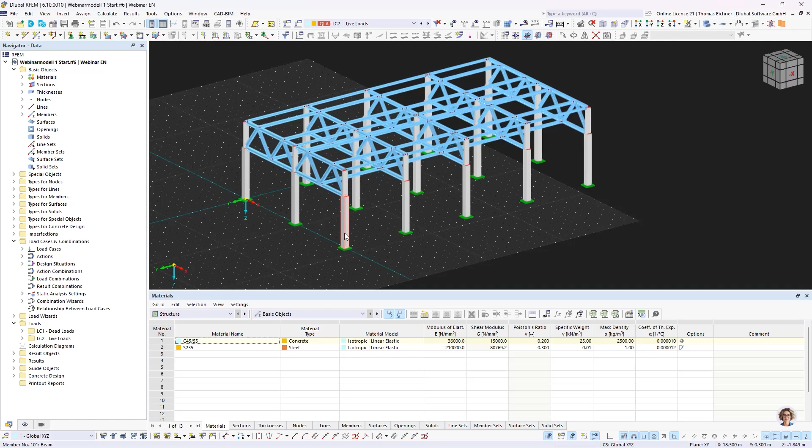We have 8 times 9 meters in the length, and we have 50 or 60 centimeters times 60 centimeters columns here. Those columns will get smaller on top, and this top structure is mainly a truss structure in one direction.

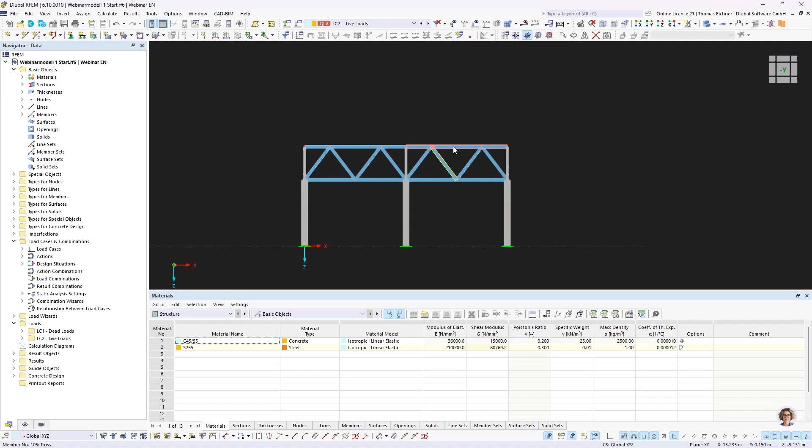So we see in the X direction we have these trusses here, and they are all trusses in this direction as well. Let's go here, we see it - we have these truss sections right here.

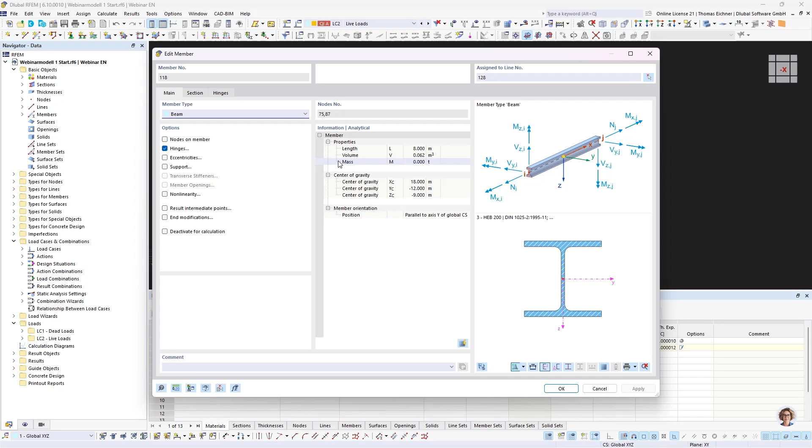In the other direction, we don't have these trusses, so I would estimate this to be less stiff. We can inspect the members in the Y direction as well, since I planned them differently. In this case, I gave them the beam member type and added some hinges for the rotational degrees.

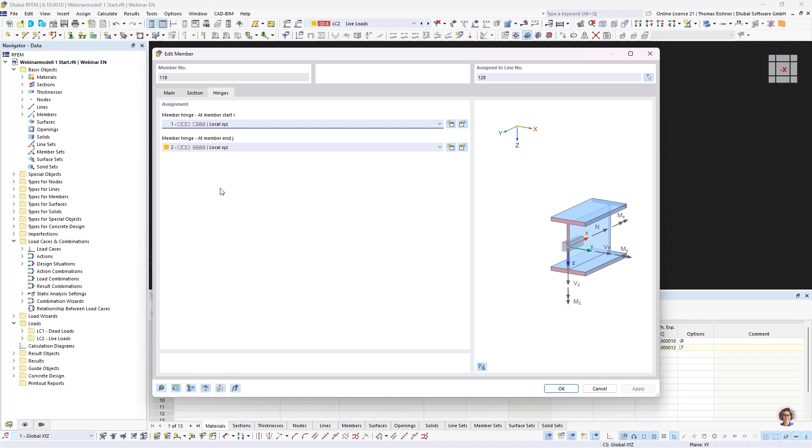So we will have the Y and Z rotation free on both ends, and additionally the rotation about its own axis will only be free on one side. Because if we placed it free on both sides, the system would become unstable, since the member could rotate around itself. So that's about the structure type here.

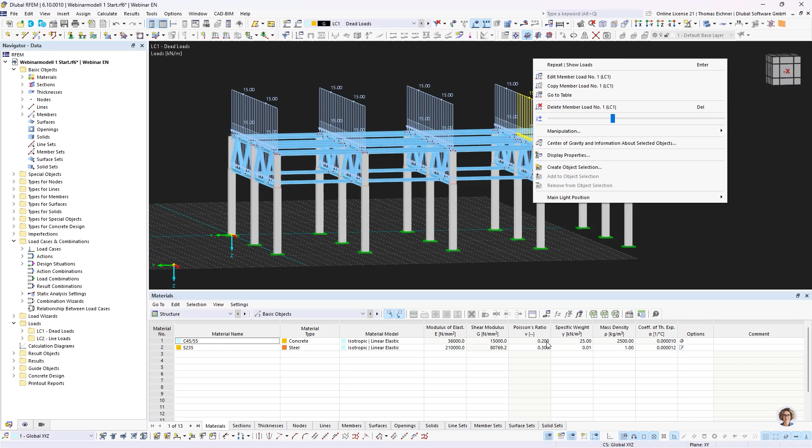We also have some loading - some dead loads, which we will inspect right here. It's really simplified to just some member loads on one hand on the top of this roof structure, as well as on the bottom part of this roof structure. So in total there are 30 kilonewton per meter in each of those rows.

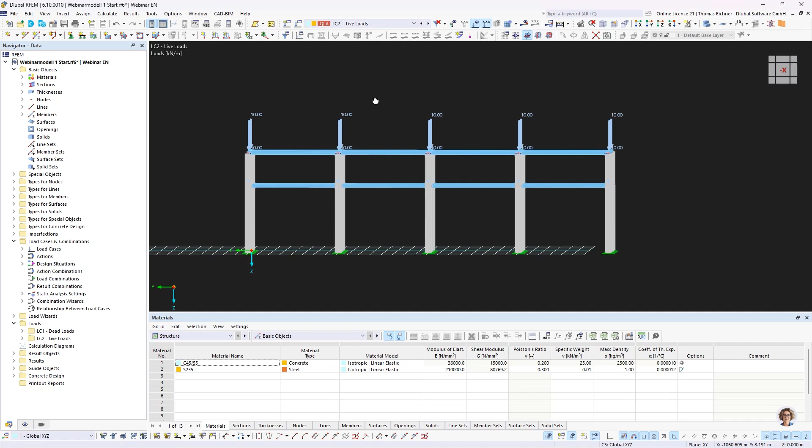And the same is also applied for the live loads, which I just simplified to be 10 kilonewton per meter on the top side as well as on the bottom side.

So now we are at the perfect start for the dynamic analysis. The first thing is we have our model finished, we have our loading finished, and we maybe also made some design already for the structural limit state. Now we want to just add the earthquake design to the structure.

And now I will guide you through that procedure. We will just start by going into our add-ons - that's always the first step to take. We will go into the add-ons tab, and there we will go for our dynamic analysis.

Since the modal analysis is always needed for one of the others, we can spare a click here. I will just go for the response spectrum analysis - modal analysis is checked automatically as well.

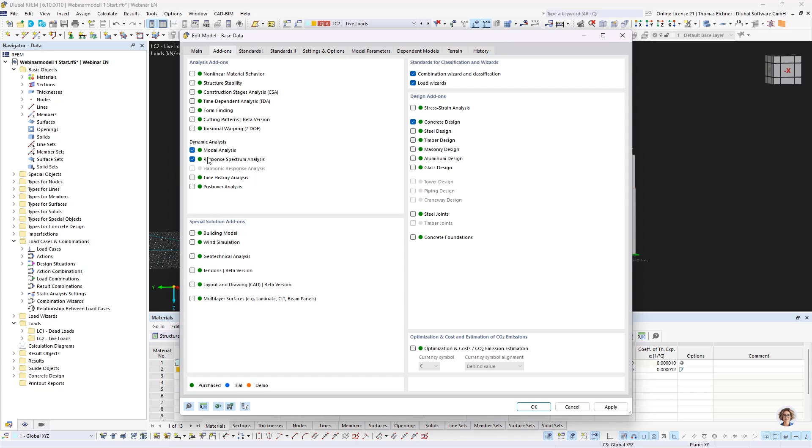Then we can check for our standards, and yes, we will just go for the German annex. The whole webinar works the same for different annexes as well as different standards, because the main difference in selecting something here is the response spectrum, not the analysis procedure.

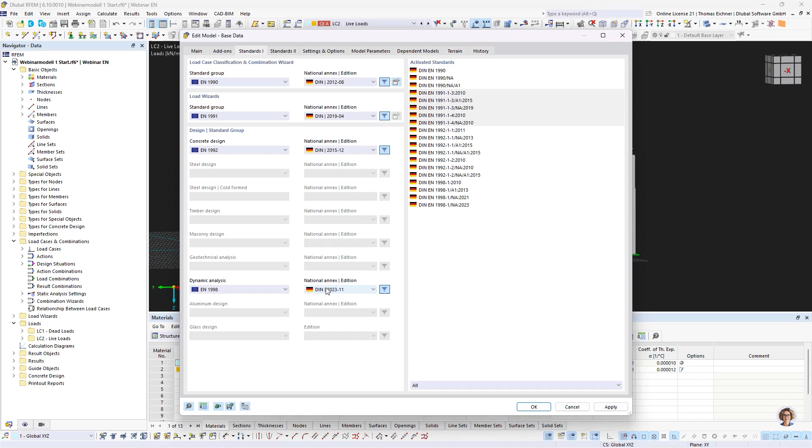So we will go with the Eurocode and click OK here. Then we will see that we have added our modal analysis settings, spectral analysis settings, as well as our dynamic loads. With that, we can start up. One thing we need for dynamics is always the masses, since in the dynamic equation we also have the masses.

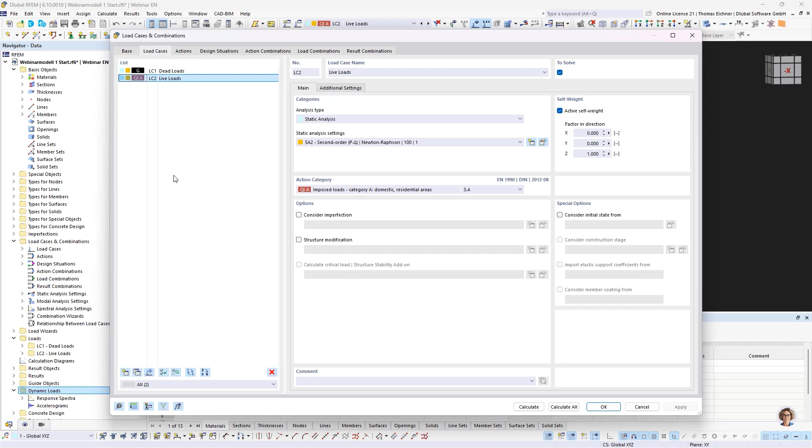So we need to define the masses. In general, we try to define the masses to be as precise as possible for the situation in which the earthquake would happen. The Eurocode, for example, gives us some combination rules to achieve this, and we will use them for automatic generation.

So we will go for our design situations, and there we will pick our seismic mass combination. For that, I will pick our combination wizard load combinations, which means now we have it automatically created. And if we now go for load combinations, we will see just the combination created, and this is the one we will use for our dynamic analysis as our masses.

So now we can go into our load cases, create a new load case named modal analysis. I'm just going to rename it here, and we will pick our masses, which we just created. We will go into our modal analysis settings, just for you to see what we are setting here first.

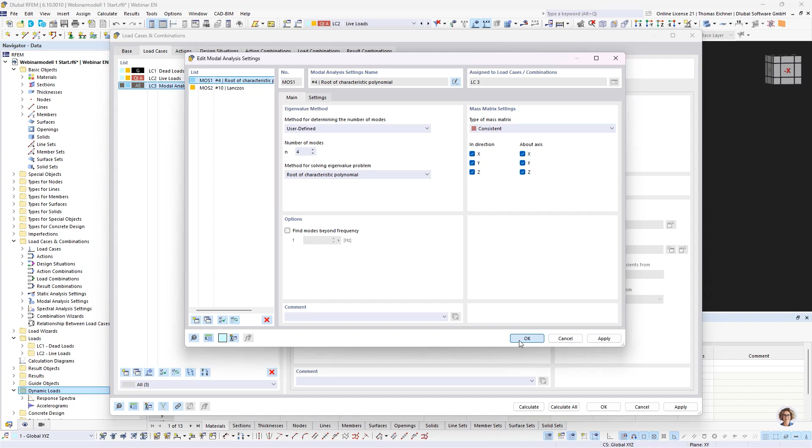Pretty much I will go for the root method of solving, since we will use that also later on for some automatics, and so I want to have it comparable in general. On the right side, we won't do anything yet. We will pick the consistent mass matrix and all directions will be active, so nothing too special here. We will press OK and continue with our response spectrum analysis.

Within the response spectrum analysis, we almost always need to consider accidental torsion, so I will just directly activate it here at 5%. That's the way to go. We will go for response spectrum right here.

We can quickly look inside. There we have an AGR value of 0.6, and we have ground type AR. If you're interested in how to pick those input values, we do have our snow, wind, and seismic load maps, which can be seen right here. With that, you would be able to just click somewhere here and find your acceleration value right there.

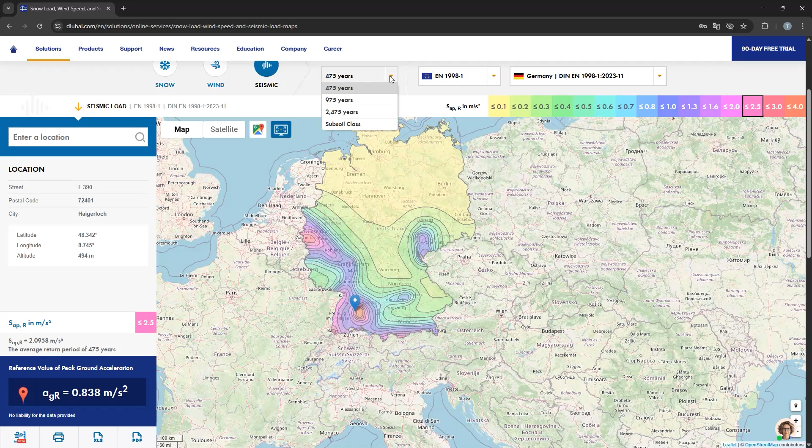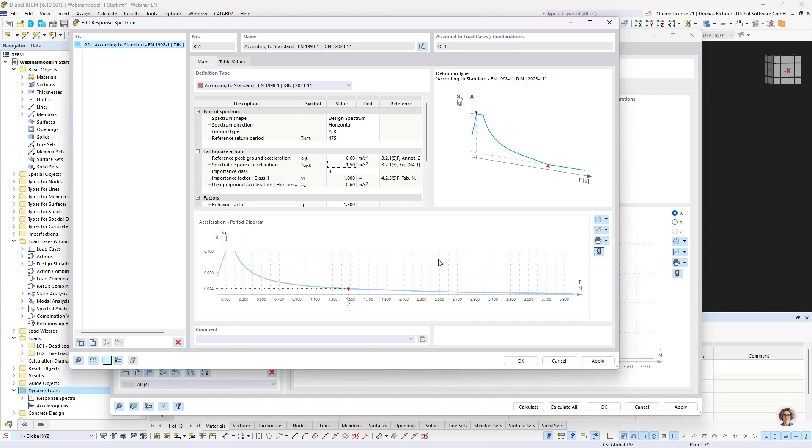Also, as soon as you switch to the subsoil class, which is here, we can also find our subsoil class. We won't take a specific site here; we just go for the standard values, which leads us to a nice 1 meter per square second peak acceleration. Also, if you're interested in those values in the gravity domain, we now have the toggle to switch between the visualization of a percentage of G or the absolute values. The same also applies for the tables, so now that's easily transferable.

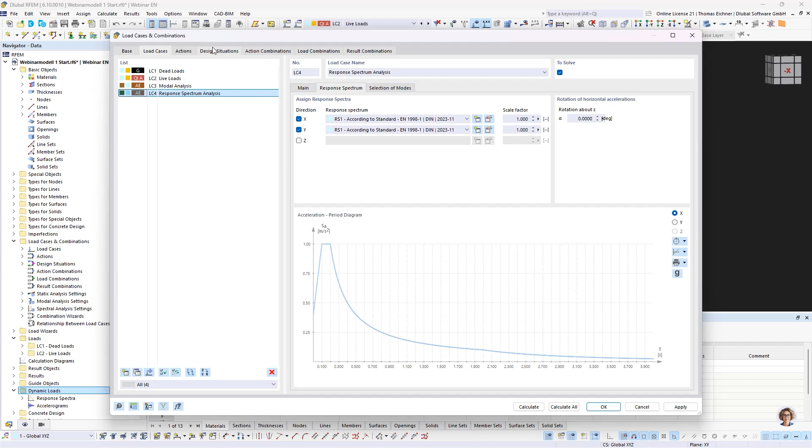When that's done, we see we have the X and Y direction, already finished here. So the last thing would be to give the results to our design add-on in the end, and this can be done by creating a new design situation. Let's go for the seismic situation in this case. And there it is, we will have to select something else here.

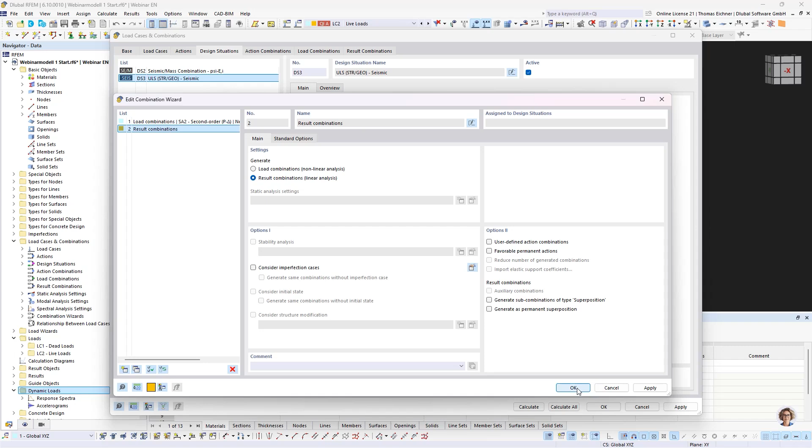If we rewind ourselves on the response spectrum analysis, we do work with results only, not with loads. That means we can't use these load combinations; we will need to use result combinations, and therefore it needs to be created because it's not automatically created by the program. So whenever you do this, you will look to create a result combinations generator. With that done, we can select it for a seismic design situation and also see the outcome right here. There it is, we have our dead loads combined with our live loads as well as with the earthquake loads.

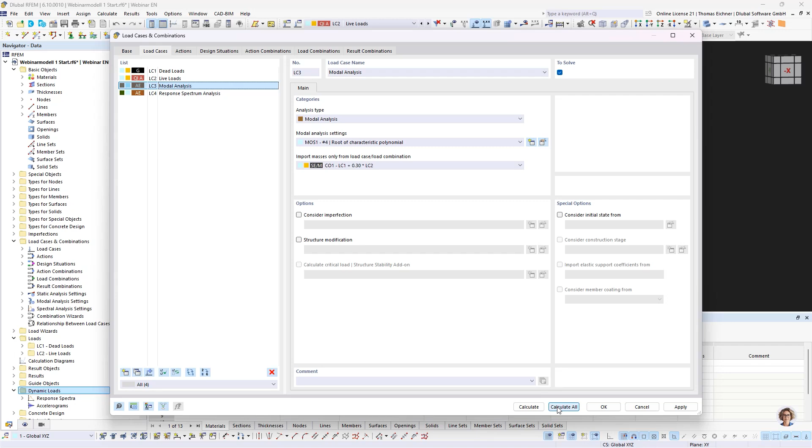Okay, so that's it for that. I would say for the modal analysis, that's the root, that's perfectly fine. Now we will just go for calculate all, and let's see what we get out there. So now it's done, we got our 4 eigenfrequencies. Of course, there won't be enough. We have a fast calculation.

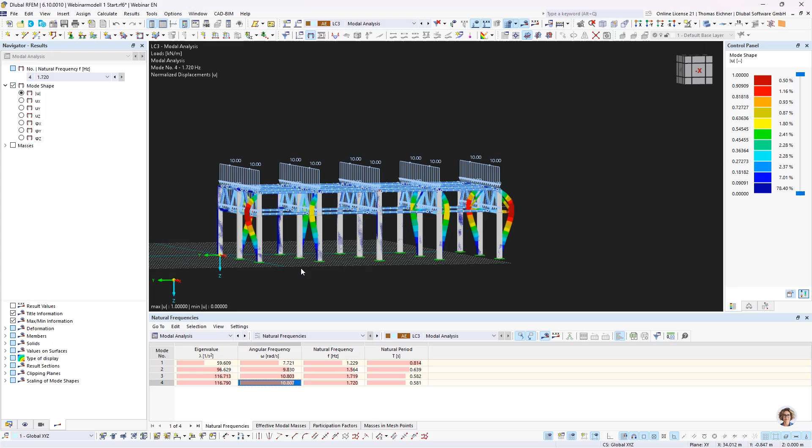We can look into our effective modal masses, and with that effective modal masses, we will see for the X direction, for example, we still don't have any mass participation at all. So that means we will need to increase our amount of modes.

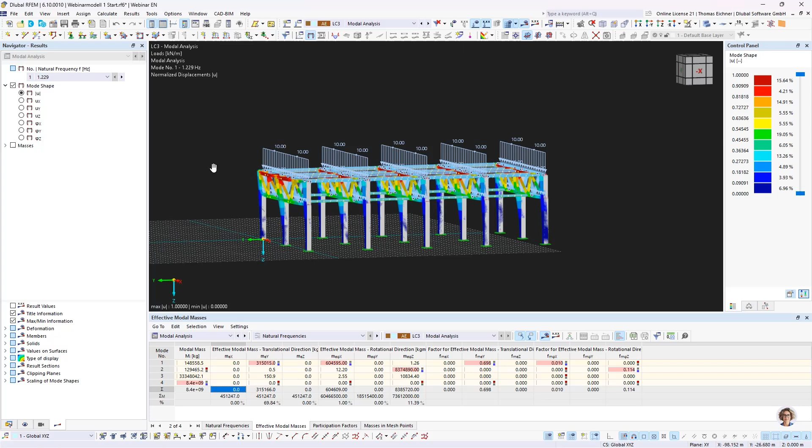And now there would be several options, and now we will look at them right here. Let's delete this one and copy that. From that copied one, I will just switch it to the automatic to reach effective modal mass factors. So this would be our first setting. Let's call it 'all,' and with all, I will reference this mass matrix setting since we did select everything right here.

Okay, for the next step, we will go for another one, and within that, we will deactivate the Z direction as well as the rotations around the X and Y direction.

And this is going to be our XY Z. So we reduced, within that setting, the mass matrix to only be in the directions of our investigated earthquake. We selected the X direction and the Y direction within the response spectrum analysis. That means we will have to consider the X and Y direction here. And also, a bit depending on the torsional stiffness of the building, in X and Y direction there's also the rotation around the Z axis, so that's like the torsional modes here.

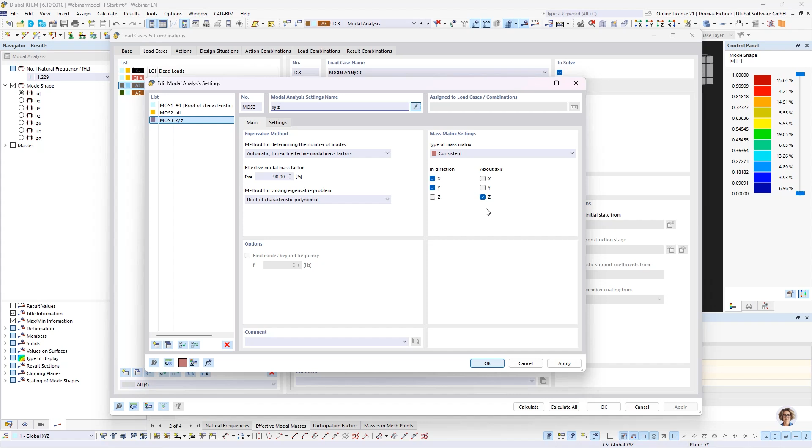Okay, for settings, we won't do anything here because we don't have to neglect masses. Just as a hint, if you have a grounding plate, then it is needed to neglect the masses there. Because if you won't neglect the masses of a supported surface, the program most probably will never reach the effective modal mass.

Since the plate can just won't move, I mean it's fixed on the ground, so it won't have any modes except for, how do I say that, like computational stiffness results. That means if you have a fixed support, it's not completely fixed. It's something like 10 to the power of 12, and therefore there would be modes also for the plates, but they wouldn't be usable. So the tip is, if you have grounding plates, you would neglect the masses.

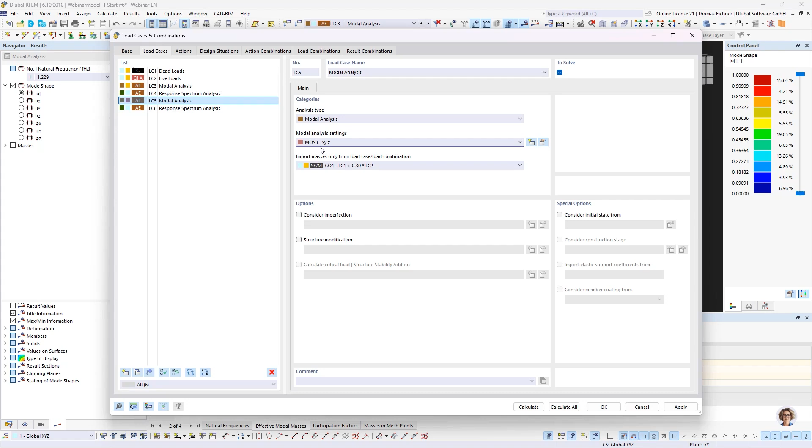So now let's get back to the topic. We have now two modal analyses, one with the whole setup and one reduced to only fit our loading direction. With that done, we can select all here, and I'm also going to do a copy paste of those two. For the top one, for the modal analysis, for the second one, we will pick the X, Y, and Z settings. And for the last response spectrum, we will pick our load case 5, our new modal analysis. And now we will have something to compare.

And for that, we will now have to calculate it. I won't let it calculate through here since it takes a few minutes for the results to be there. So we will just jump into the calculated file. Within the calculated file, it's pretty much the same, just with the results.

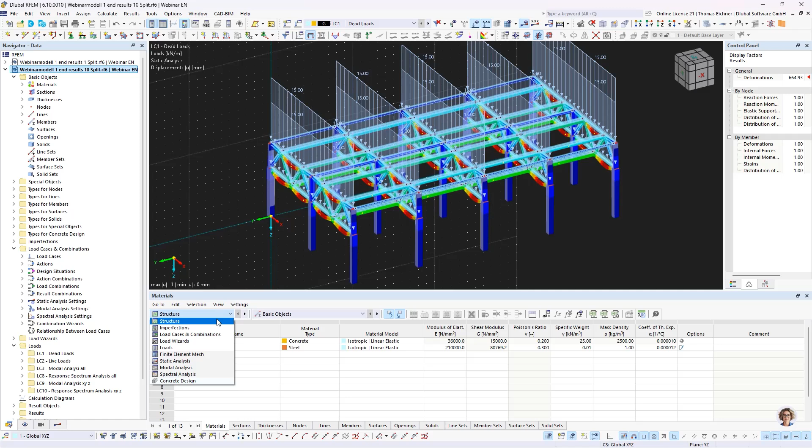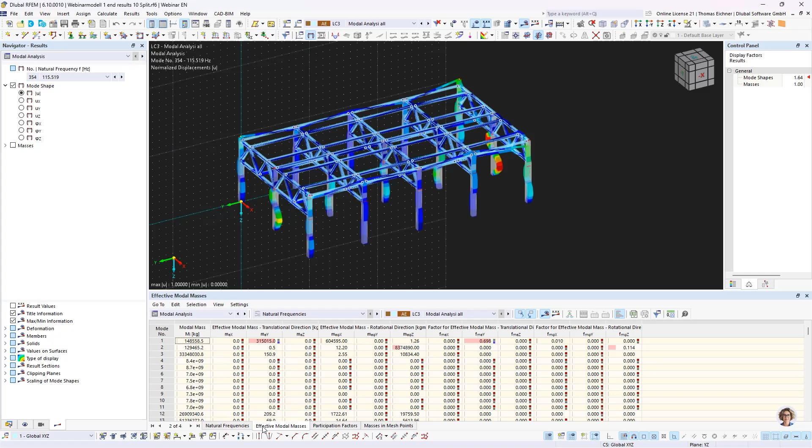And what we want to see here is the results from the modal analysis. So let's look at that here. Now we are looking at this precise modal analysis, which was with all mass matrix entries, and we will see around 354 modes, where some modes are really only local modes in that case. So we will have to reduce those. We will also see in the effective modal mass tab that we have tons of modes which just don't have any effective modal mass here, so they could be neglected in general.

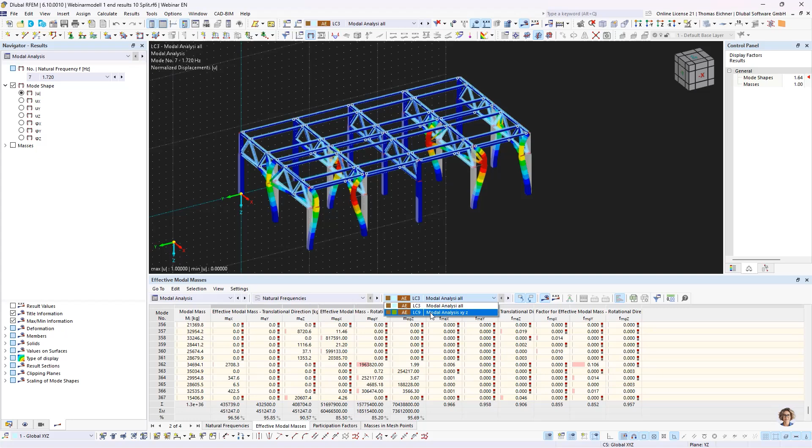Okay, so let's compare it to our second one. As a reminder, we have 367 modes here. We will go for our modal analysis X, Y, and Z, and there we will see we reduced the amount of modes drastically. We only are left with 79 modes here. So the mass matrix settings are one way to drastically reduce your eigenforms.

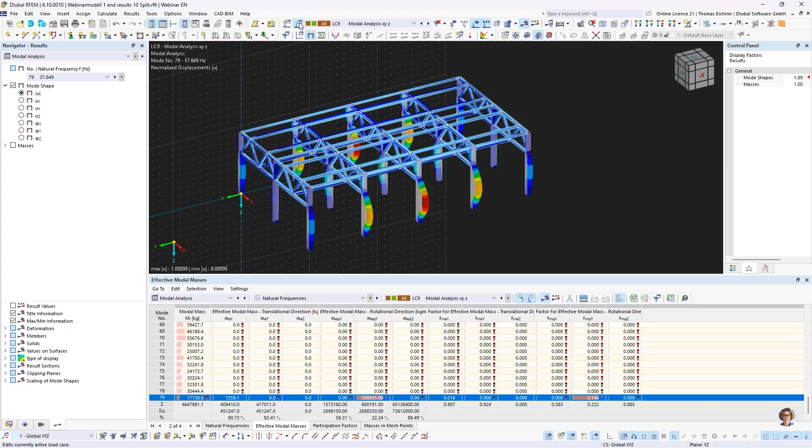Also, if you like to have some more speed within the modal analysis, we also have the possibility to change to the diagonal matrix here. Well, it's not as precise as the consistent matrix, but we also have to reconsider we are working in the earthquake field within the response spectrum analysis, and there are lots of uncertainties.

And if you compare that all to, for example, Pendelschlagversuch, it's like if you test windows, there you would let a tire fall against that window, and that's called the German Pendelschlagversuch. So within that Pendelschlagversuch, we would carry out a time history analysis, a nonlinear time history analysis, and each time step and each result is extremely important. So for such analysis types, the consistent matrix is needed. But for earthquake design, we can always think about using the simpler diagonal matrix.

Okay, so we will stay with the consistent one. And yes, maybe one more hint here. We have further options. We can also go for the modal analysis to be carried out within a frequency range. So for example, you could go and search for natural frequencies above 15 Hertz and below 17 Hertz.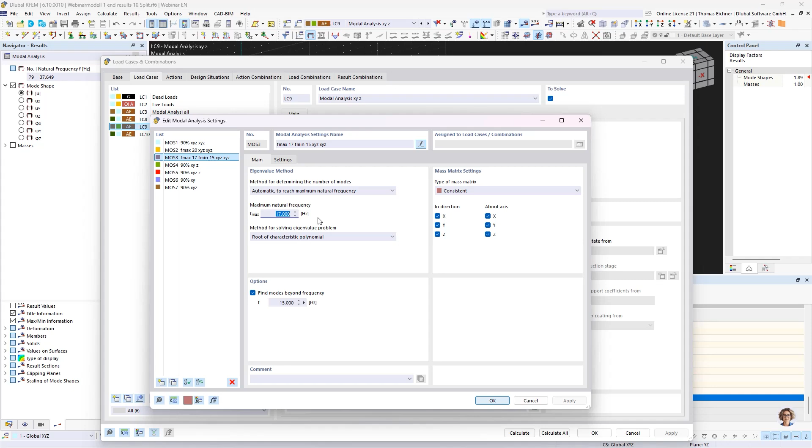Let's just do this for a second. We will just select this one, this one modal analysis settings. The rest can be the same, and we will just calculate that one.

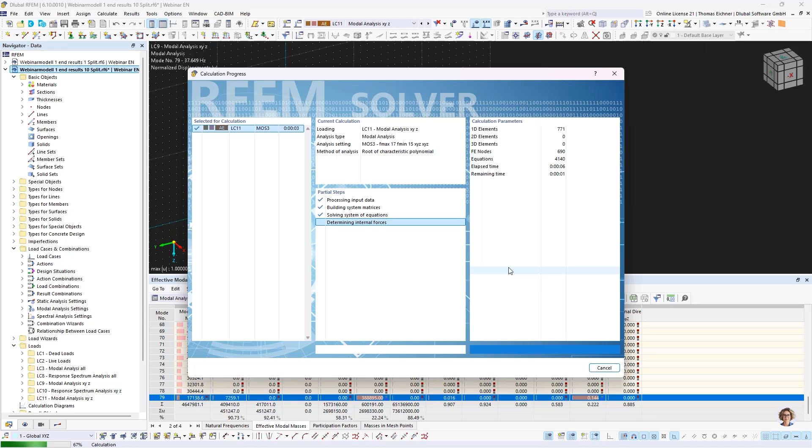The biggest benefit is that it's faster if you know your region of frequencies you're investigating, because you don't have to calculate all the previous frequencies in that case. Now we've got it, and we can look at the natural frequencies there. We see perfectly fine - we got all the frequencies between 15 and 17 Hertz. With that, you can construct your own system of modes here.

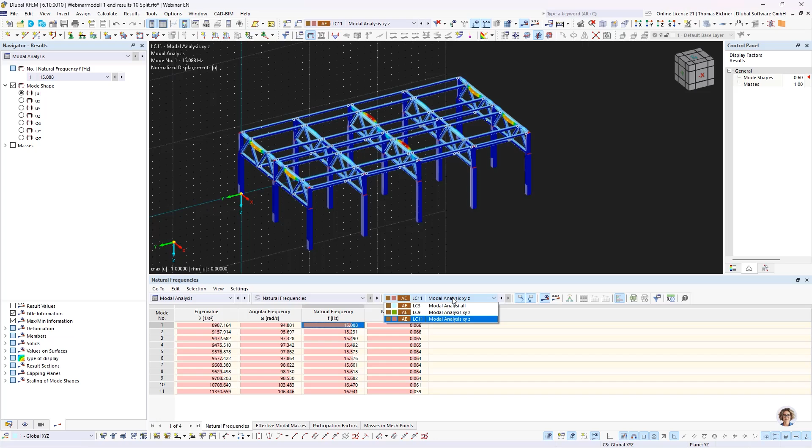Okay, so another thing - I'm going to deactivate the results there, go into our frame model, and we will look at our finite element mesh. What you see now is that we have multiple finite element points here on every beam member.

There can be one eigenform per degree of mass freedom - that's how I call them. For example, this finite element point: with our mass matrix definition, this point could move in the x direction by 1, and that would be one mode. It could move in the y direction by 1 - that's another mode. And it could rotate around the z-axis - that's the third mode. So for each of these points, we have theoretically 3 possible modes.

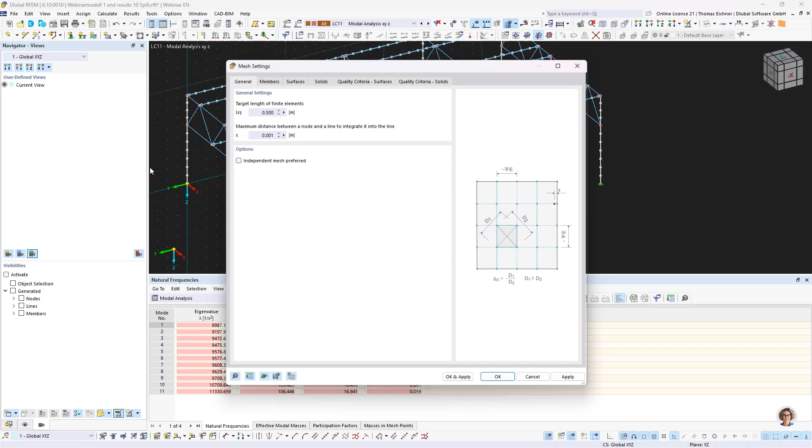That means we can reduce our amount of modes if we reduce our amount of mesh nodes here. For those systems, we can just go for our calculation here - we go into our mesh settings and into our members.

Within that, we can see that we have a division of 10 for special types of members. This field is also used for the checkbox below - it says activate member divisions for second order and large deformation analysis, structural stability, dynamic analysis, imperfections, initial strain, and so on. With this checkbox, we will activate the split also for the dynamic analysis.

I'm going to keep it simple - I'll just pick one here and leave this option on. That's perfectly fine, and with that we will get rid of our plenty of in-between FE mesh nodes. It's also worth noting, as you can see, only the beam members have those mesh nodes - the truss members do not. Internally in the program we implemented simplifying those truss members to 2 points, since it's just not needed to have more, also for static analysis.

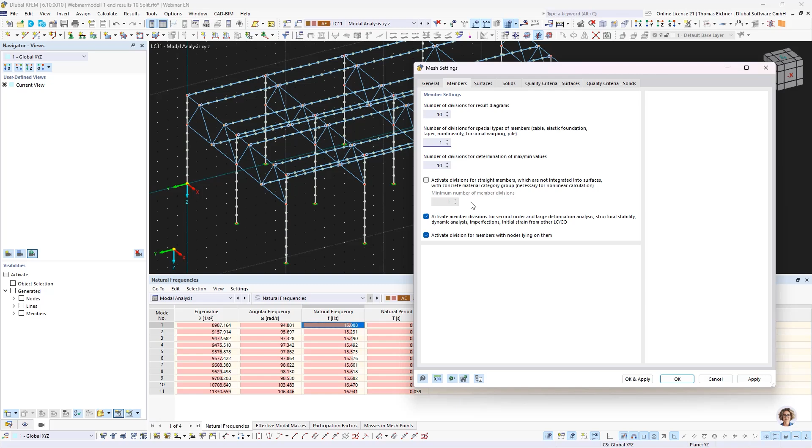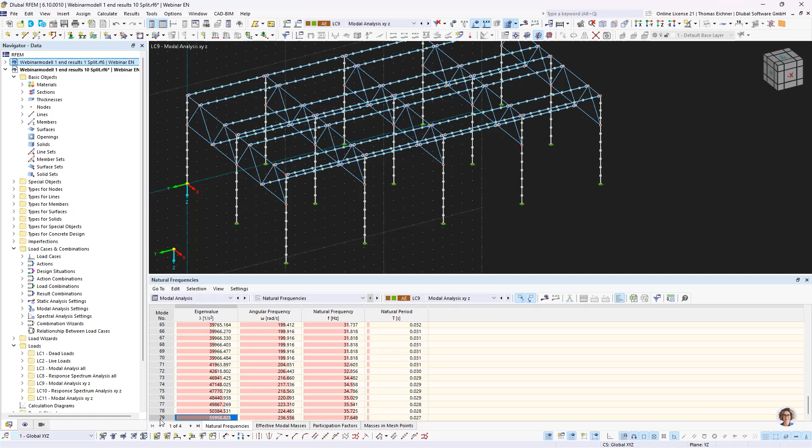Okay, let's see - I'm not going to save it. I have the results of that exact file also right here. Let's look at the one with one split. Before we switch, I just want to have a last look at our X, Y, Z modes - we had 79 modes in this case.

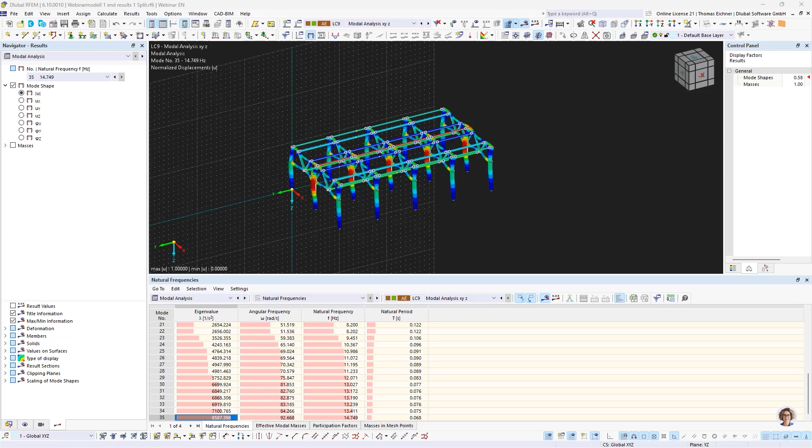Now let's see - we do have the response spectrum analysis carried out already here with the whole mass matrix. We also have the response spectrum analysis carried out with the reduced mass matrix. All the other settings are pretty much the same.

Now we can go and look at our results, since it's important that our results do match with those simplifications. With that, we will just go for the maximum displacement - we can see it's about 6 millimeters. If I switch here between my response spectrum analyses, it's pretty much the same deformation figure, and also the same 6 millimeters. For a rough test, I would conclude the results to be equal in both analyses.

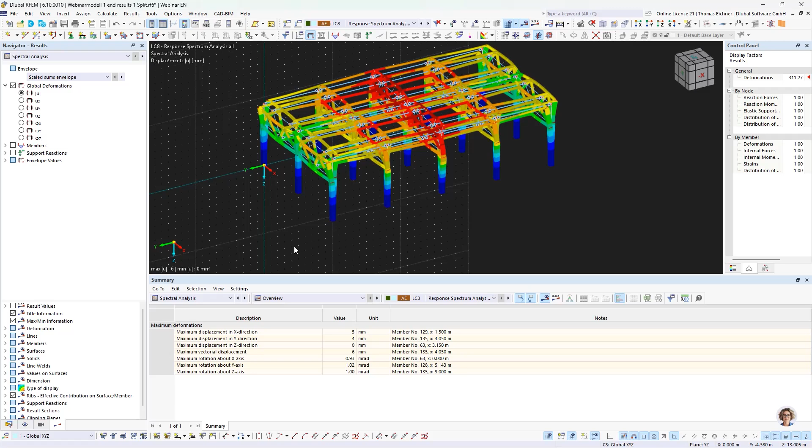Okay, so now we have our model reduced, we have our eigenforms reduced. What I did not mention yet is the selection of the eigenmodes within the response spectrum. In general, we will go with the simplified one - if we go for the selection of modes, this won't be on and everything will be selected. So this would lead to 35 modes that need to be calculated.

But since there are lots of zero modes, we can further reduce them here. We will just go for an effective mass ratio - we will neglect all the ones which are, let's say, some testing, all below 1%, and we will still be over 90% in the y direction, so that's possible. With that, we will lose again like 2/3 of our eigenforms.

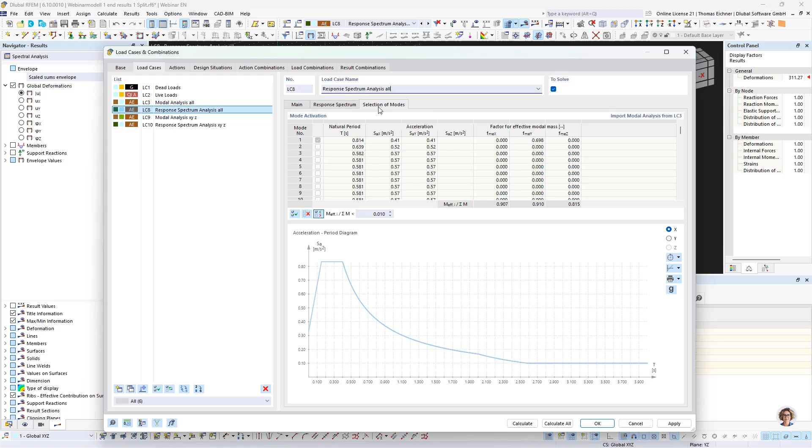What do we have left? 1, 2, 3, 4, 5, 6, 7 modes - we're left with 7 modes within the simplified one. What would it be with the exact one? Here we see it - I also adjusted it here, and I counted them before: they are roughly about 20. So again, quite a lot more than in our simplified variant.

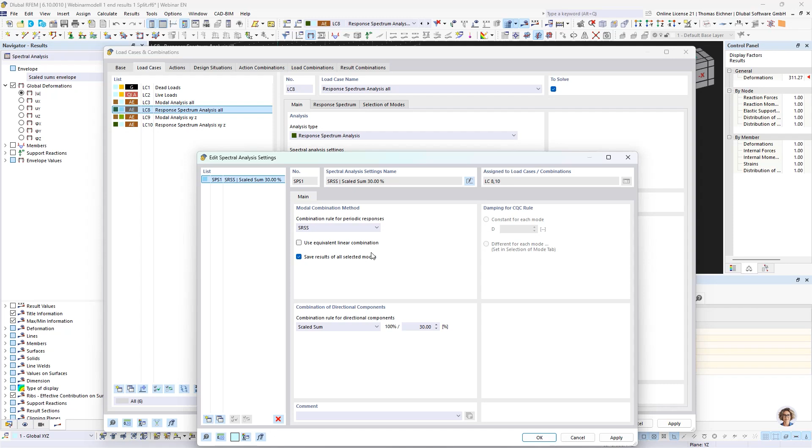Okay, so we have that. Now we will also go for the last performance setting. Within our spectral analysis settings, we have the option to save the results of all selected mode shapes. I almost always do it. It's going to increase the calculation time because it also has to save everything in each calculation, and it will also produce bigger files since you will have all the nodal and member results for each mode available.

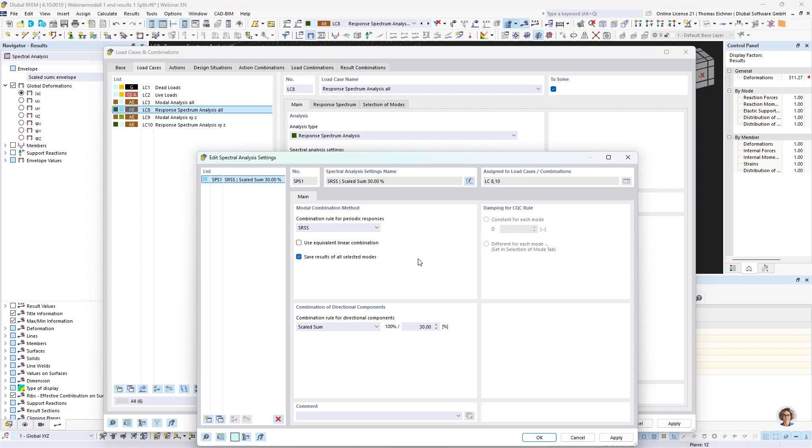So the thing with this is you would use it with, let's say, up to 20 or 50 modes, but if you exceed those amounts, I would not save them. You should only save them if you really want to inspect them. Else it's just unneeded data storage.

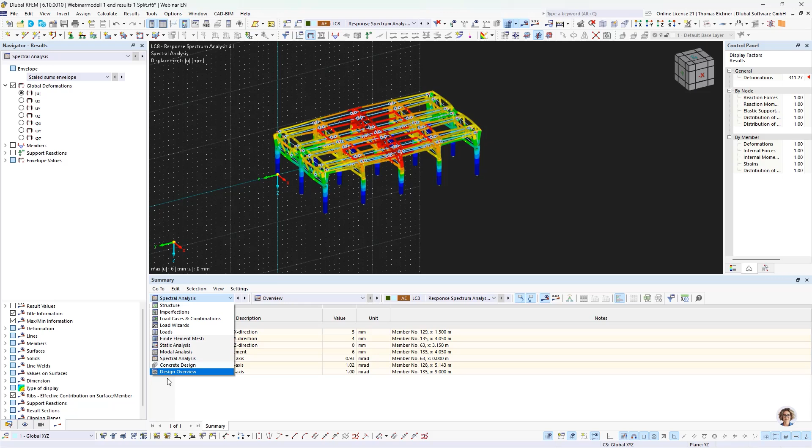Okay, so now we are through with this model. The last thing I want to show you is the interaction with our design modules. Within the input data, we can go for the ultimate limit state. We have it defined, we have it to design. We have here the accidental one, and we can also go for the ULS one.

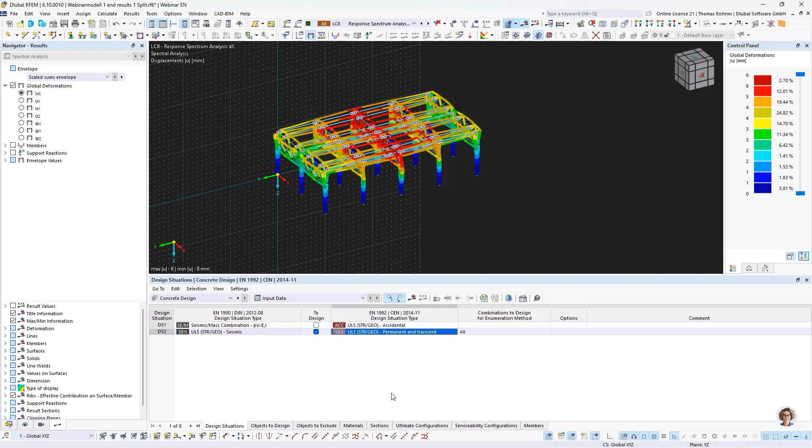Then we will get the ULS checks performed. We will just calculate it. And there it is. I only inserted that one column for the checks, but as you can see, the results are possible to be overtaken into our design add-ons as well.

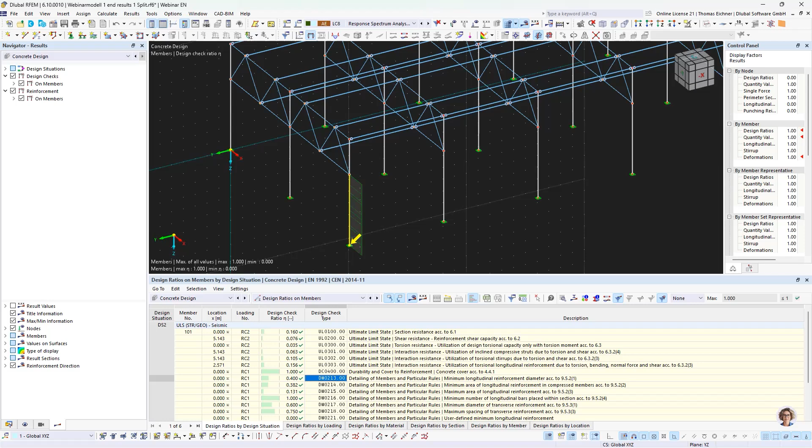So then we will jump right into the second model. Let's see, I have it right there. And now we have Truss Hall. In that case, we have pretty much a block used here.

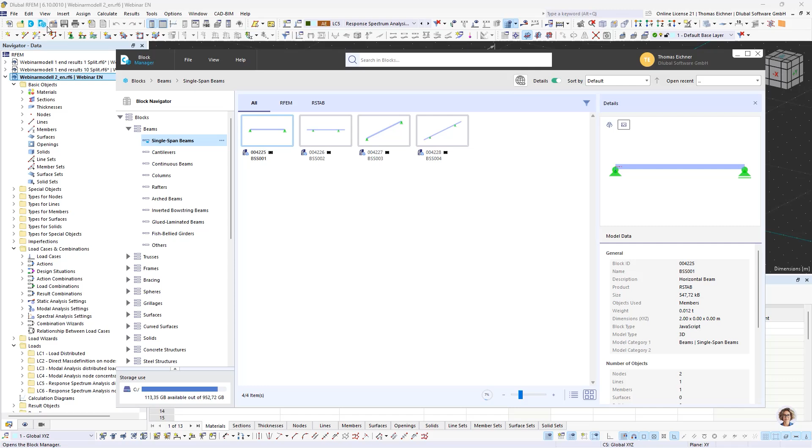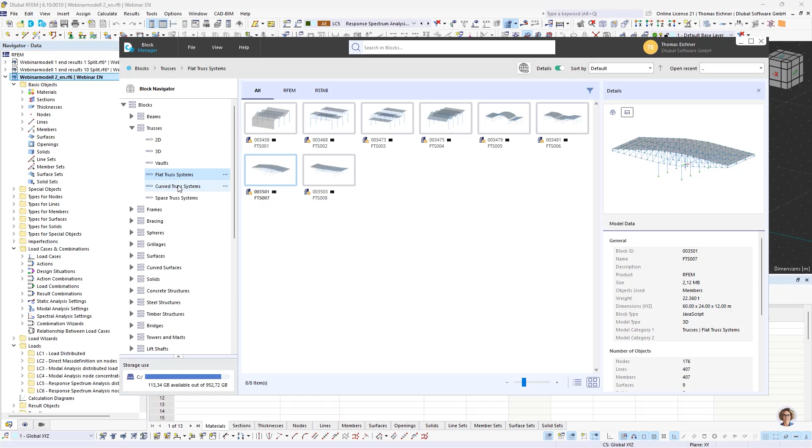If you did not see the blocks before, I will briefly show them to you. When we click on this top left button here, we will directly navigate into our block manager, and there are several examples of buildings. For today's webinar, I oriented myself on our truss systems. There are lots of examples you could use for your structure, as well as our flat truss system, where there are also more complex systems already pre-built. And further, we can go into the curved ones.

Well, here's exactly the model I am using in the background. The only thing you would have to do when you select such a block is look into the graphical user interface there. The main point would be to still adjust our members. For example, here there's all with our reinforced concrete ones. We can change them and also directly see the changes now in the model.

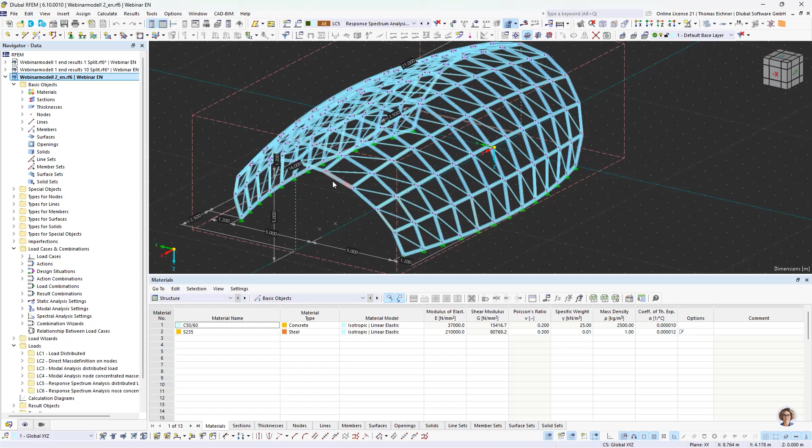I did that all already for our system, so we can just jump into our real model again, and we will see we have some trusses in between, in diagonals. We have some, and the rest are mainly HEB 120. Exactly, so that's the system we will inspect now.

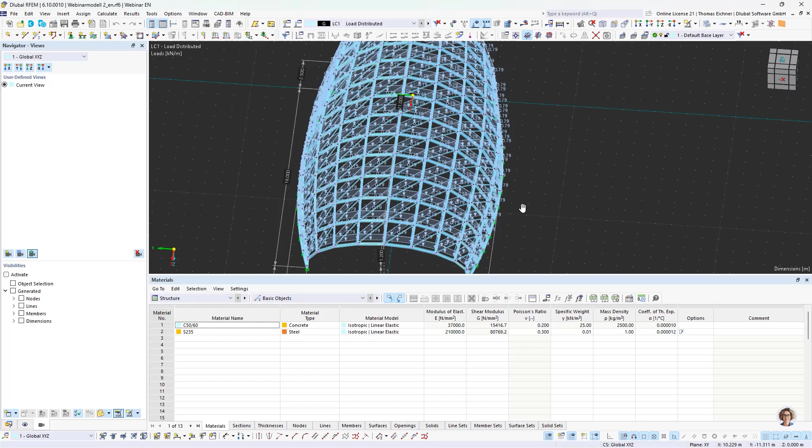Now we can go for our loading, and with the loading it will be pretty clear what I'm trying to show in the end. Here we have our uniform loading. I made it really simple, I just placed member loads on each member in this case. We have a total loading. Let's see the results again, right here of 585 kilonewton with this distributed loading.

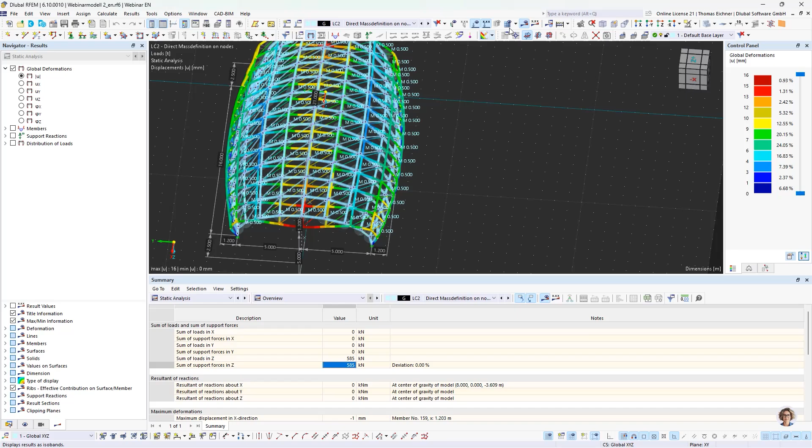In the next variant, I created a load case also with 585 kilonewton in total, but instead of having them distributed over the beams, we concentrated single mass loads right here. For your information, you can create such mass loads just by changing the load type into mass, and with that we can just place them on any node as well.

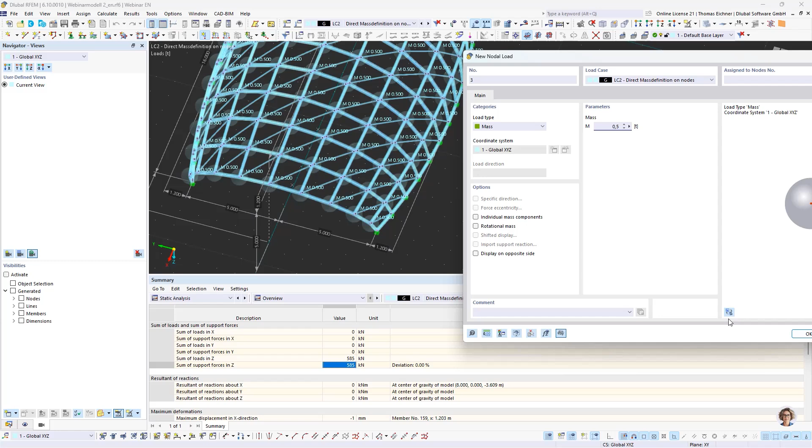So I did it already for all the nodes here, and now we have the equal system with two different loading approaches, and we will just go for the investigation of our mode shapes there. So now we will go for our modal analysis with our distributed load.

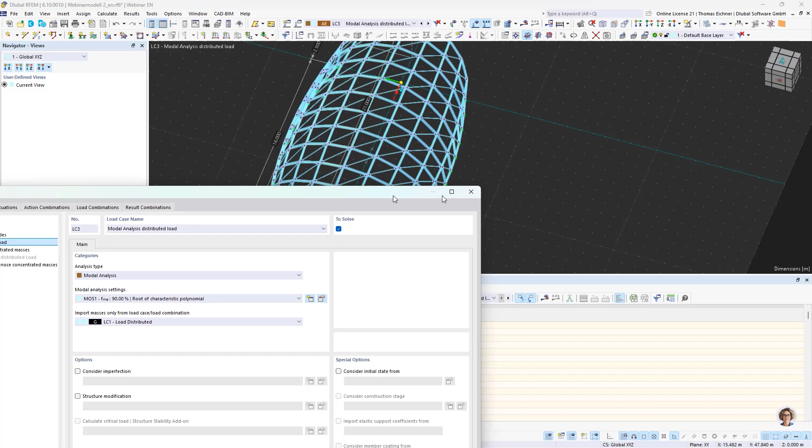We will jump into the settings so you are up to date on what we performed. We did the simplified ones, so the X and Y direction as well as the rotation about the Z axis, and we used the distributed load. That's it for the other.

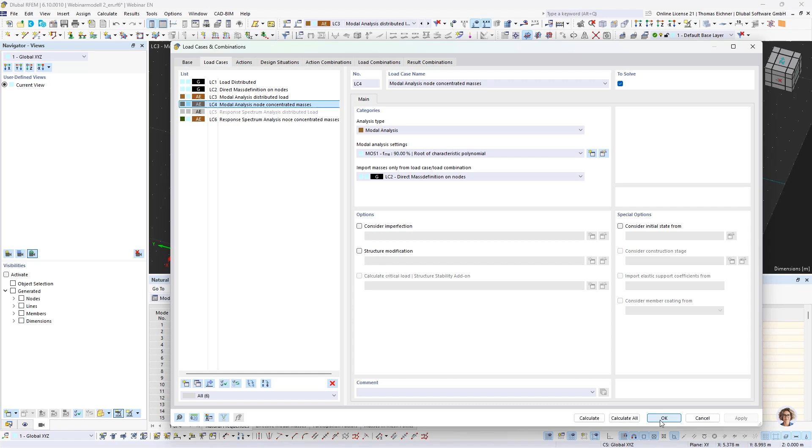For the modal analysis, we just picked the masses differently. There we picked this concentrated mass on nodes definition. Okay, so now we have our distributed modal analysis, and we will see about 548 modes within the effective modal masses.

Well, we see here a region. It looks pretty useless to me because it's almost zero at the most part, and it's pretty low. So I would say those are way too many modes to treat.

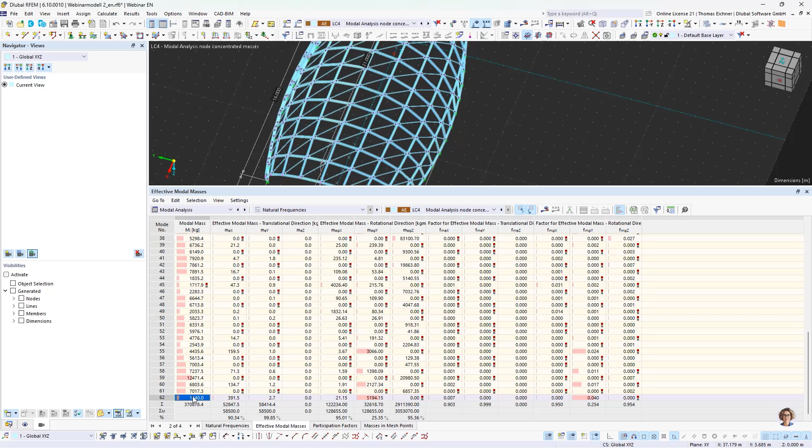Now let's compare it to this different modal approach where we concentrated the loads. And there we go, we reduced the modes by a factor of 10. So for your information, what we did here is we went with our member divisions of 10. We would achieve a similar effect as in the other model if we also decreased this number of divisions to 1.

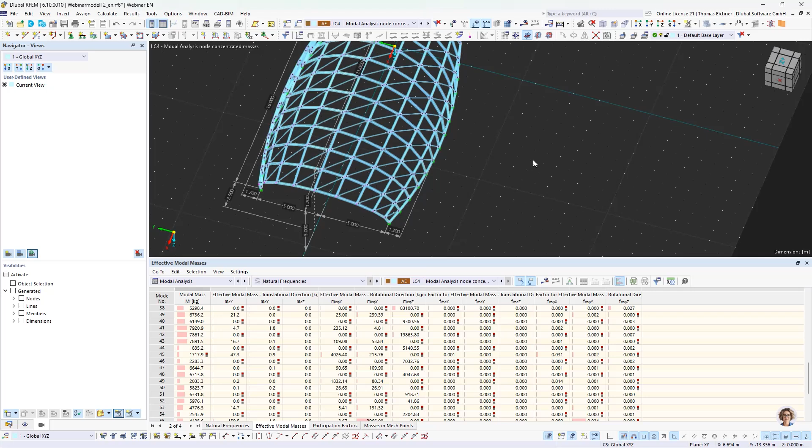One benefit of our mass definition here is that we directly place our masses, and within the response spectrum analysis with accidental torsion, the program will automatically generate torsional moments at every place where masses are. That means at members, for example, that are modeled with two hinges and are not really torsional stiff, they will have a torsional moment in them.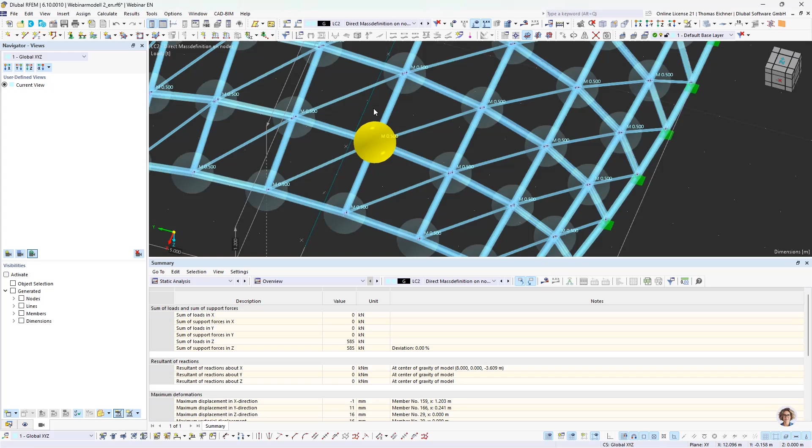With that direct definition of the masses, we can force the program to make our torsional moments at that point. So that's another benefit of this modeling approach. Okay, so that's it for this one.

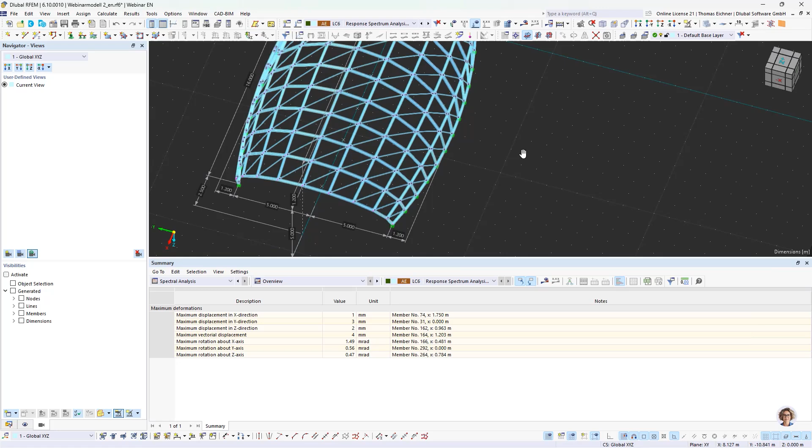Now we can go for our last one, load case 6 in that case, because we can also go on our response spectrum analysis results. And within that, we can go for our results. Well, now we see here the 4 millimeters, and it's a pretty nice model now.

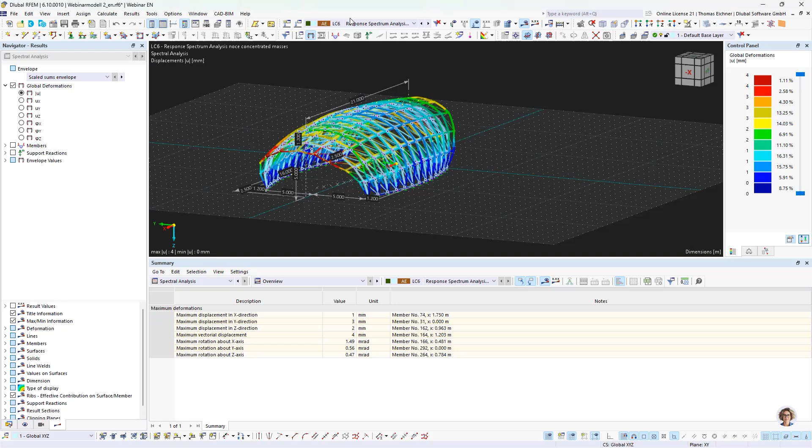Let's see into our distributed load one. We can also go for the results here, and there we will get the problem where we have tons and tons of response spectrum analysis load cases carried out. So we will not wait for this now.

Just as a hint, we have this multiple processor function, so there will be several carried out at once. Nevertheless, those will just be too many to be done in a fast time. So the reductions of the modes should always be carried out.

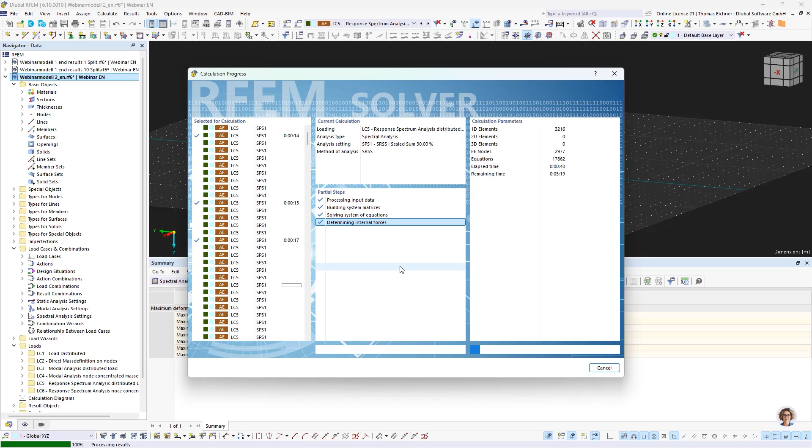So let's go for the final conclusion here. When we treat a truss model just like this, where we have tons of members and we want to carry out a response spectrum analysis, then we can get into the problem of too many eigenforms very fast.

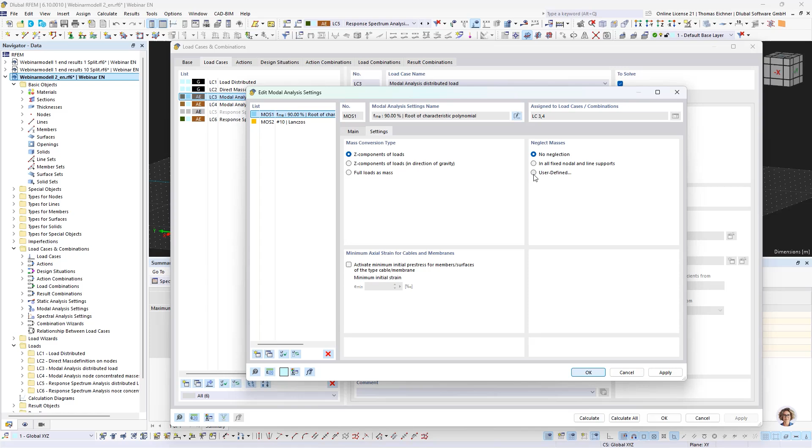The possibilities to reduce these eigenforms are: we adjust our modal analysis settings, we adjust our directions here, we adjust also our mass matrix if wanted. We can go for the diagonal one. We also want to neglect masses which are supported, and we want to neglect surface masses if they are a ground plate.

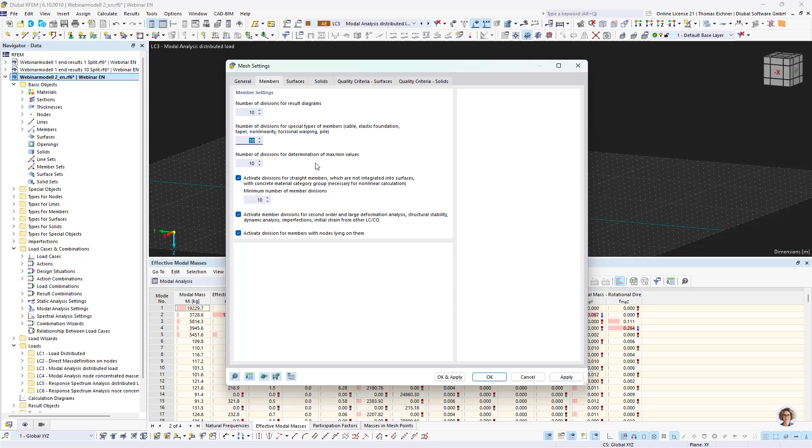The next thing is we can go for our mesh settings and reduce our member divisions to 1. And the last approach, which is linked to the most work in the end, is to directly define your masses wherever you want to have them.

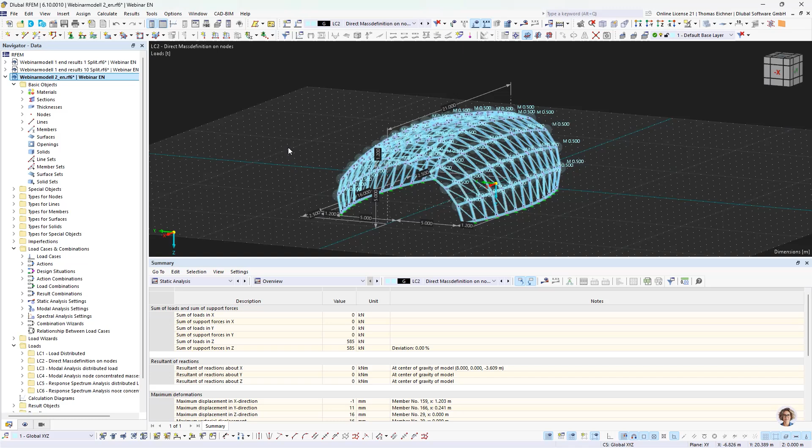So those are all the possibilities for you to reduce the eigenforms. You can also use our special functions in the modal analysis to find frequencies above or below a certain frequency. This can also help in such situations, but they are suited only for very special cases, and so you would have to decide on your own which procedure would fit you best.

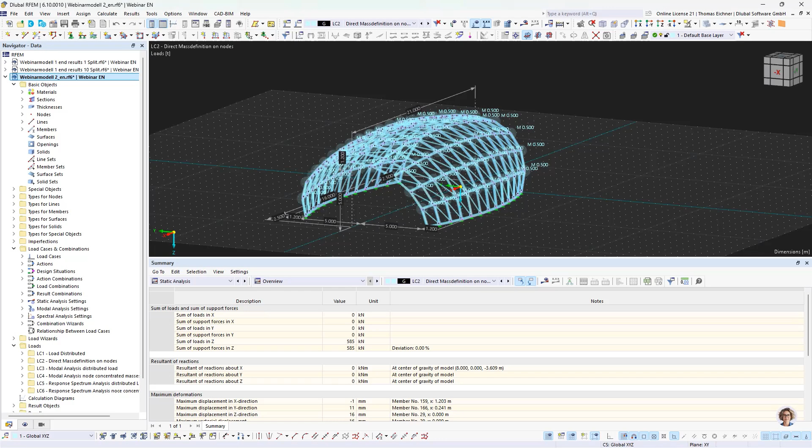Okay, well, then we are already done with today's webinar, and we will just jump into our presentation again.